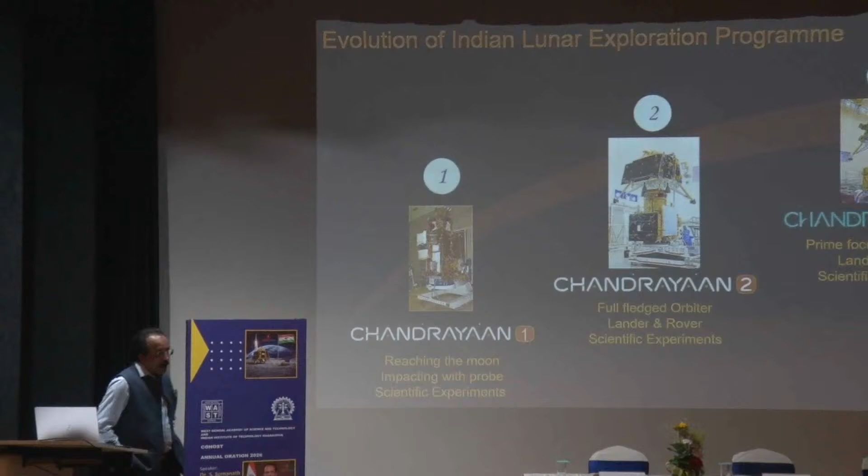So the evolution of Chandrayaan happened with Chandrayaan-1. This was a time when Dr. Madhavan Nair, who was the chairman at that time, was looking at why don't we even look at how to go to the moon. We had no rocket at that time. The rocket we had was only PSLV, which can lift hardly 1 ton plus a little bit to a polar synchronous orbit.

This idea of sending something to the moon was not easy because we needed to find how to send a significant mass - unless you put sufficient mass, you will not have enough fuel to go there and land, or even orbit there to be captured in the moon's orbit, or do meaningful scientific experiments. Still, we worked on it and came up with a method by which we could put it in a large elliptical orbit, slowly raise it to reach the moon's orbit, and then capture it on the moon using a very energy-efficient approach.

I think this is something very unique - others have not done this in the past. So we were able to do a mission with the PSLV rocket to go to the moon, and Chandrayaan-1 was really momentous in its accomplishment. I will show you that in terms of finding new science from the moon.

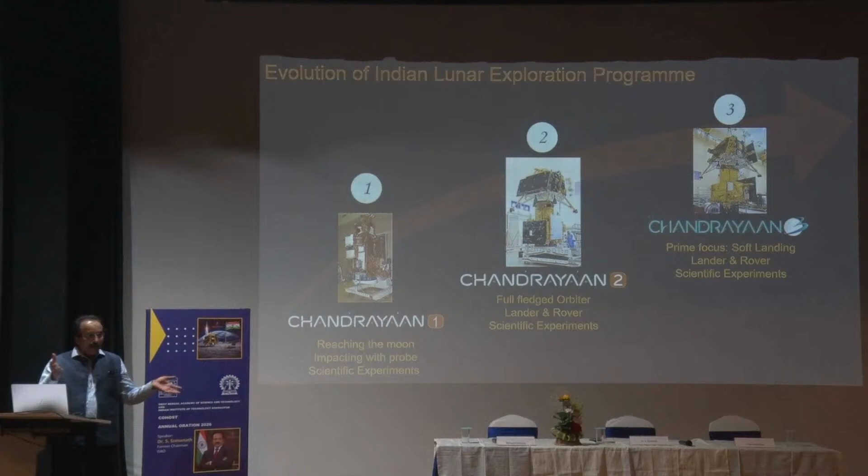And Chandrayaan-2, all of you know, where I had a role to play in terms of the rocket we were building and also the propulsion we were developing for soft landing. Of course, this couldn't achieve that purpose of soft landing, but that was really achieved using Chandrayaan-3. And that's got all these awards - this AIAA award, and the recent Goddard Award, is something that came as the latest of the awards. It received many awards in the past from most of those scientific organizations across the world.

Now, Chandrayaan-1, when we were envisioning how to do it with PSLV using the approach I mentioned, the real scientific payloads to be put on the moon - the entire mass of the satellite was hardly 1.38 tons, and the mass of the payload, the instruments supposed to do the measurements, was hardly 20 kilograms. You can imagine how much of the satellite is propellant, because we need to travel all the way up to the moon to be captured there and brought to a circular orbit.

But then what really happened is once we were building that satellite, a suggestion came from Dr. APJ Abdul Kalam, who was the president at that time. He said that when you are going to the moon, don't go empty-handed. You must put something on the moon, an Indian flag should be placed there. And that direction was given just 6 months before the launch.

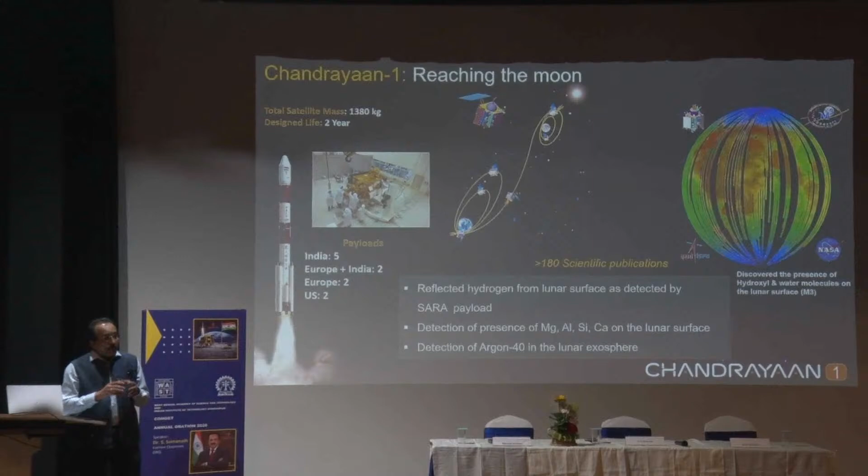Then we had to build something called a moon impact probe. That was put as an attachment to the main satellite, with a separation system so that we could throw it onto the moon's surface and take measurements while it was descending through the so-called atmosphere. There is no atmosphere on the moon, we know that.

But it actually produced so much data, especially on the presence of hydroxyl molecules in the upper layers of the moon. That was one of the earliest findings. Many of the payloads in Chandrayaan-1 were actually not made in India. We announced across the world that others were free to donate payloads, and we would host them on the moon probe to find new science. Today you know the first ever discovery of hydroxyl molecules on the moon was done by an American instrument, and later an Indian instrument discovered it too. So from that context, many of the accomplishments of Chandrayaan-1 are really phenomenal.

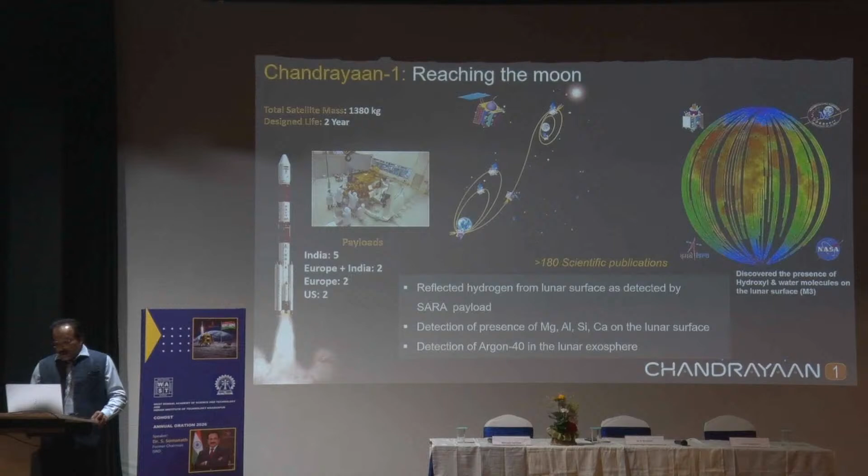Some of the findings of Chandrayaan-1 are really interesting. For example, there was a belief, even after Americans, Russia and China had landed on the moon and were exploring it, that the moon is bone dry. But some new findings from the moon missions were phenomenal, and interest grew much stronger once we discovered water on the moon.

Today we know water is not just a trace material there; it is possibly abundant deep beneath the surface. This is currently being postulated and yet to be discovered. The moon was supposed to be geologically dead billions of years ago, but we now know it's no longer that way. It's a dynamic and volcanically active body. Though there are no visible volcanoes, it must be internally active.

Then there are other findings. For example, it was believed that moon's regolith absorbs most of the solar winds and protons, but that's not the case. Similarly, the lunar wake - when you face the sun, the backside shows a wake, and this wake was believed to be devoid of all solar influences. That belief was also found to be wrong by Chandrayaan-1.

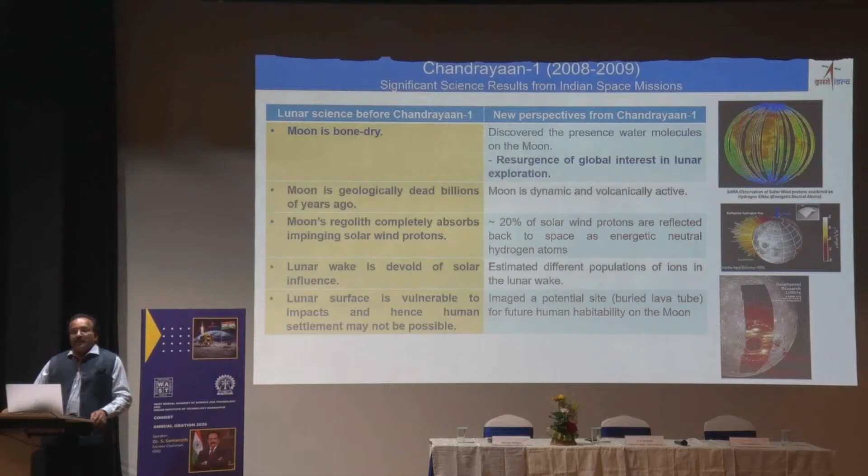Then there are worries about whether we will ever be able to go to the moon and create a settlement, because in the absence of atmosphere, there are a lot of impacts happening on the moon, making it unsafe to settle there. But the current understanding is that there are buried sites and interconnected tunnels on the moon where human beings could possibly settle safely, protected from such impacts as well as radiation. Some of these findings came out during the Chandrayaan-1 time frame, 2008-2009.

Similarly, the moon impact probe was the first probe from India which actually impacted the southern pole of the moon, even before Chandrayaan-3 landed there. Whatever India put on the moon was farther south of where Chandrayaan-3 actually landed. So we must give credit to Chandrayaan-1 for putting something on the moon surface very close to the pole. It impacted nicely, though descending at high speed it would have crash landed and wouldn't have survived.

But during the descent, we had a camera and some instruments that actually measured data. We have beautiful spinning images of the landing on the moon, and also early detection of water vapor on the moon.

Today we know that the discovery of water on the moon came from the payload called M3, a mineralogical payload from the US, but the Indian instrument also detected it. Today we have a map - the picture shows the concentration level of hydroxyl molecules distributed on the surface of the moon. And we know today the pole of the moon carries more water than the equatorial regions.

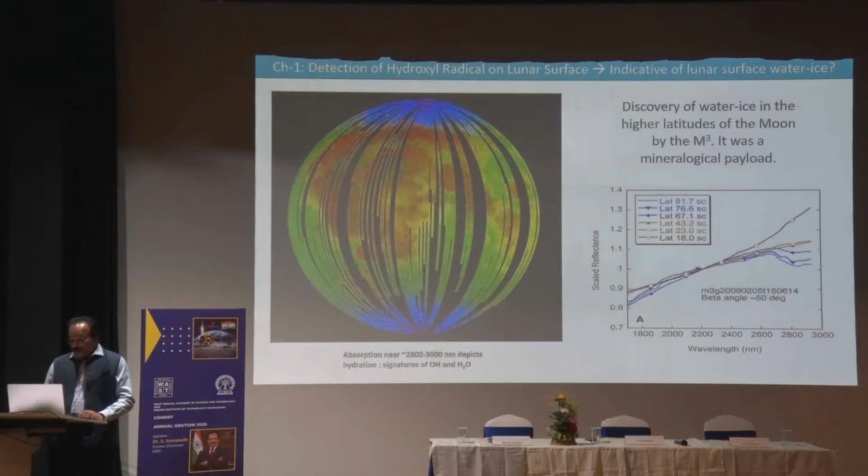Another interesting observation came from the payload called SARA, which looked at the solar wind protons, the hydrogen high energy energetic neutral atoms in the wake field of the moon. This was a very interesting feature which was published and caught a lot of attention from the global community, because we were moving around the moon and could do measurements on the farther side, the wake side of the moon, specifically from this payload.

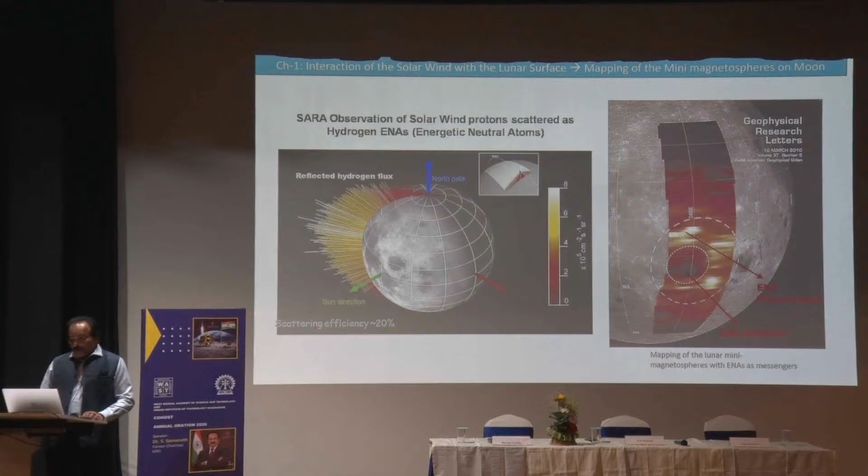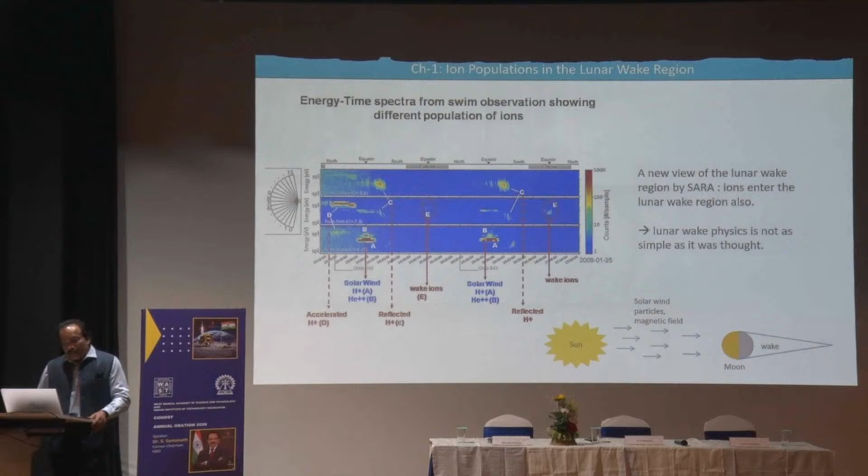Again, the ion population on the lunar wake was also found out from the time spectra of the observations that we did from the same instrument.

Not only were surface hydroxyl elements found, but also the presence of hydroxyl molecules in the atmosphere of the moon was detected using our instruments. For example, the exosphere of the moon also contained water molecules.

All of you know that the moon is not having an atmosphere. What made the atmosphere disappear, and whether there is any way to recreate an atmosphere on the moon, are questions being debated and discussed. What geological activity made the atmosphere vanish - is it from solar radiation, pressure, or impact? There are many questions, but it's interesting that there is continuous loss of volatiles and material from the surface of the moon to the atmosphere, and it is actually measurable.

And actually, water on the moon was not detected on the surface first - it was actually detected in the exosphere layers of the moon using this instrument for the first time.

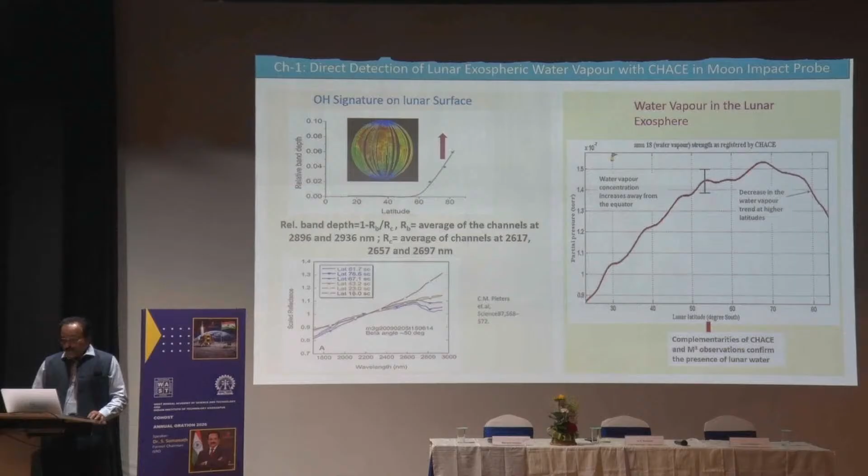Now coming to Chandrayaan-2, the interest in Chandrayaan-1 was really very good in the scientific community. But continuing in the Chandrayaan-1 mode was not going to bring us any benefit, because we would not have any in-situ measurements - most of those were remote sensing type measurements, going to the atmosphere and probing the surface.

But by the time a new rocket was in place, the LVM-3 - because PSLV can lift only hardly 1.1 tons, but now we have a new launch vehicle, the LVM-3, capable of lifting almost 4 tons to orbit - this gave us a great possibility to design a craft with an orbiter, lander, rover, etc.

I was the project director, the first project director who made the experimental launch of this rocket, and later the cryogenic engine development and making it operational. But by the time Chandrayaan-2 was conceived and ready for launch, the LVM-3 had done only 3 missions, and the 4th mission had to carry Chandrayaan-2. I think any spacefaring nation will not take the risk of putting a high-cost scientific mission on board a new rocket which is not yet declared operational. We were only doing qualification launches, and the operational launches were yet to happen.

But then we decided jointly within the organization that we were going to send this craft to the moon, and I am really thankful to the chairman at that time, Dr. Sivan, who allowed me to make that decision and get it implemented, because there were a lot of worries internally. But we said that we will make this rocket succeed this time.

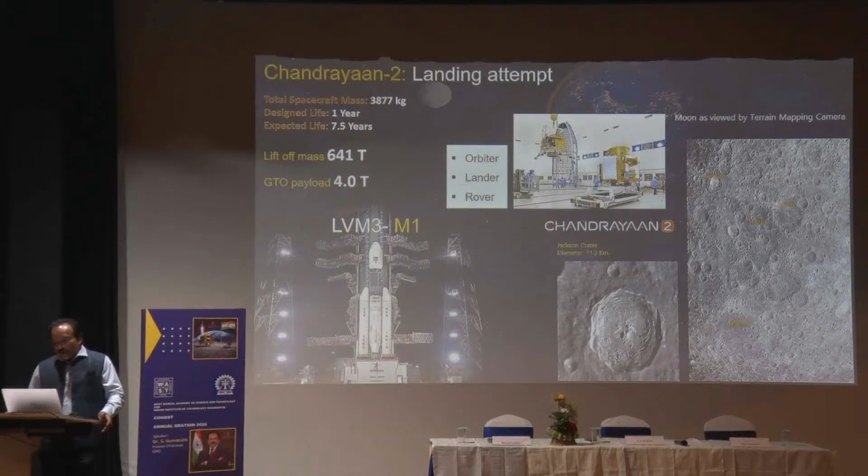We were able to supply this data to them, so they were able to use this data for their planning purposes, location identification, as well as trajectory planning, which are based on vision. So that way we contributed to the global interest in moon missions. Possibly after the Artemis 1 mission, there could be better images from the US. We'll have to see that. But as of today, in the public parlance, Chandrayaan-2 images are the best images available at the moment.

Now coming back to Chandrayaan-2 scientific results, the earlier finding of the presence of hydroxyl molecules, etc., was confirmed by Chandrayaan-2. Because the lander crash landed at the soft landing attempt, we were left with only the orbiter, with a certain number of instruments on it. Using those instruments, we continued to do scientific studies. There was still an instrument to look at the water molecules, and it was again confirming it, and also confirming the mineral composition of the rocks on the moon, which is similar to that of Earth.

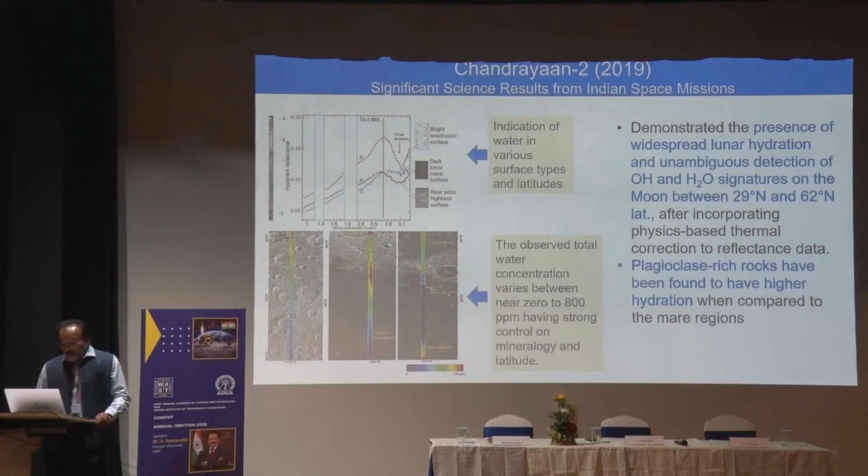For example, silicon-based, calcium-based rocks were discovered there in abundance, which raises some questions on the origin of the moon: whether the nature of the material on the moon and the nature of material on the Earth are similar. It cannot be exactly similar; it varies from location to location, but still you can make a reasonably accurate assumption based on the measurements that it originated from Earth-bound materials, and did not come as a separate object and get captured in the orbit of the Earth. This was a basic question which was still being discussed.

Another interesting finding from Chandrayaan-2 was the distribution of sodium on the moon, using an instrument called CLASS on Chandrayaan-2. Sodium in the form of its constituent minerals changes with day and night characteristics, and its concentration also changes from the equator to the pole regions, with an asymmetry between the north and south poles. All of this was part of the significant mapping of minerals using the remote sensing capability of Chandrayaan-2.

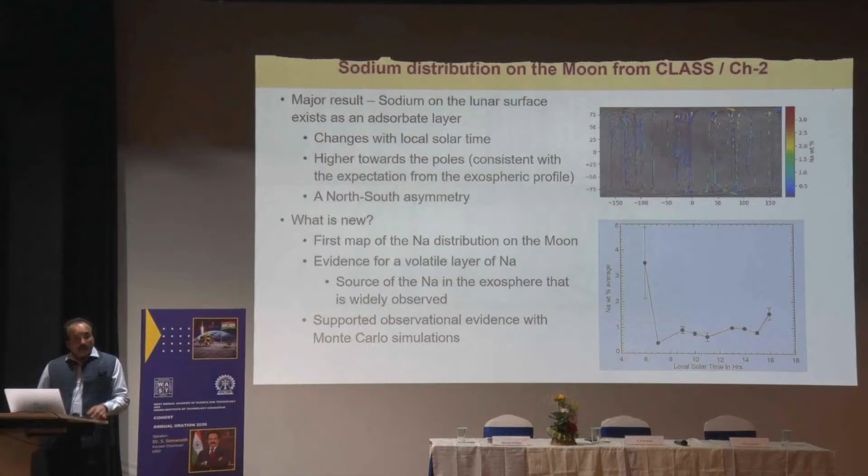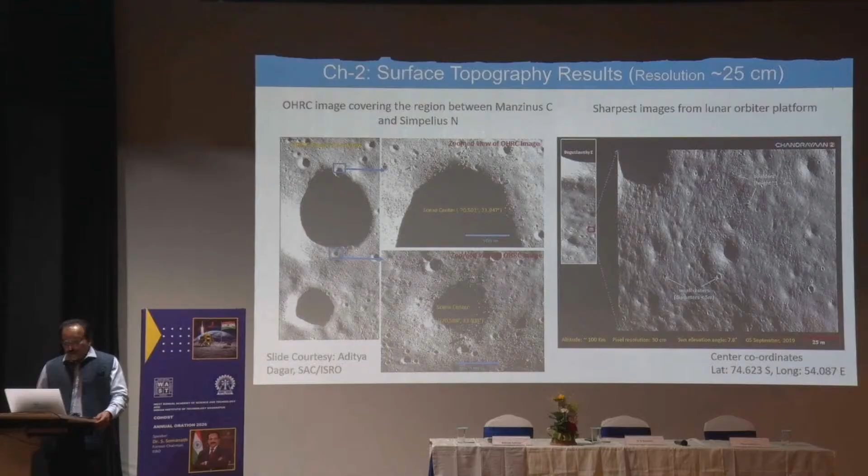And I talked about the image quality. So we have wonderful images of the moon surface from Chandrayaan, the sharpest ever images, which include looking at some of the landing sites of other missions and taking better images of the craters and boulders. Many of these images helped us plan the Chandrayaan-3 landing site locations much better later. We also had analysis of the boulder distribution across various landing sites, which gives a much clearer perspective of the size of the boulders.

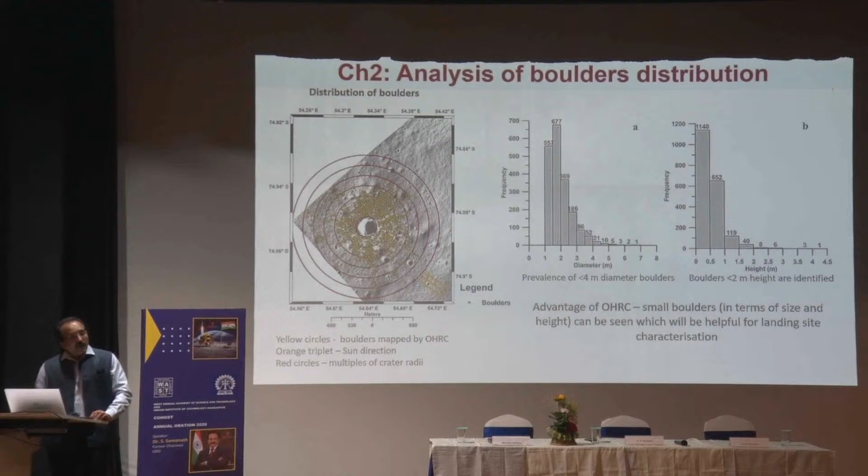Because if you have to make a soft landing, you need to keep away from boulder-dense areas. Where there are boulders in large numbers, you will not be able to find places to soft land properly, because if some of the legs touch boulders, you will end up with a tilt exceeding the limit of the lander. It may topple, which actually happened for many of the landers landing along with us. This information was crucial to ensure that we land at a place where the boulder distribution is manageable. This was done using the images while Chandrayaan-2 images were coming to us.

Another very interesting finding from Chandrayaan-2 was buried craters. This also created a lot of interest globally. There are craters, but over a period of time, soft material like dust covers them, and you do not actually see them. These can be seen only with a type of lidar or radar imaging, which penetrates deeper. You see the density variations, and you can make them out. These are not hard surfaces; these are soft surfaces. There could be a crater where, over time, material got deposited and covered it so that it's no longer detectable.

On Earth also there are many craters which, over a period of time, you don't even see. Cities possibly cover them, but there are natural craters available as proof of large meteorite impacts on Earth also.

I think the same, I'll skip this. Similarly, there are many other findings. For example, the distribution of argon-40 is another very important discovery in the upper atmosphere of the moon, which actually showed the origin of argon and where it is actually originating from in the geological processes. And this was such an important discovery, as the decay characteristics of materials within the moon regolith or the rocks were an interesting aspect to be studied.

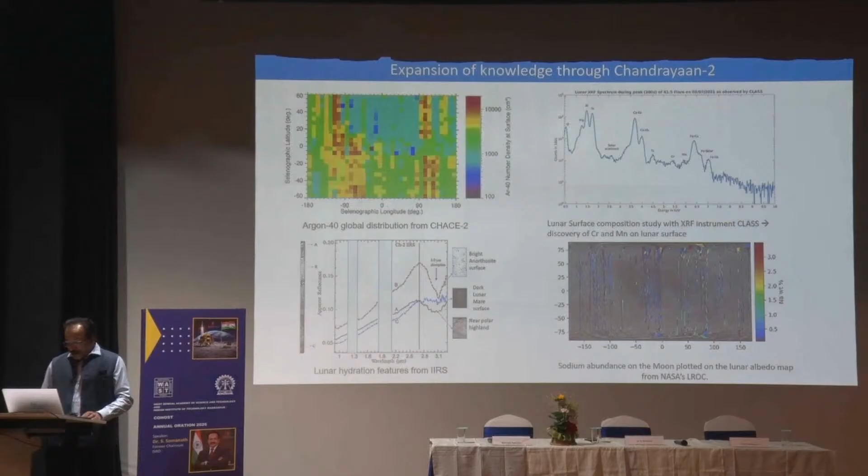So similarly, corroborative measurements from other instruments, from other international payloads, were also done during this time using the Chandrayaan-2 mission. Now, all of you would definitely ask what really happened in Chandrayaan-2 and why it didn't soft land. I think this is something very important for all of us to understand, and how we made Chandrayaan-3 land successfully. So this was very interesting, because by the time the soft landing could not happen, we constituted a failure analysis committee. We went through the reasons why the soft landing could not happen.

But then in a community like this, I cannot give you very precise answers of what exactly went wrong. You have to pardon me, except that you want to know very specific answers. There is a community which is heterogeneous in terms of describing what went wrong. But in a simple way, if I were to tell you, there were many failures. There is a principle in engineering: things go wrong when all windows align.

There are protections against propagation of failures. If something is not done properly, it is actually stopped by a protection somewhere. And if that protection is not there, it propagates to the next level. And then there is a protection. If that is also not there, it propagates to the next level. So if a failure path is aligned so that all windows are open, then it actually manifests in terms of a real failure. It's a very classic aspect of engineering design, how you really prevent a failure from propagating.

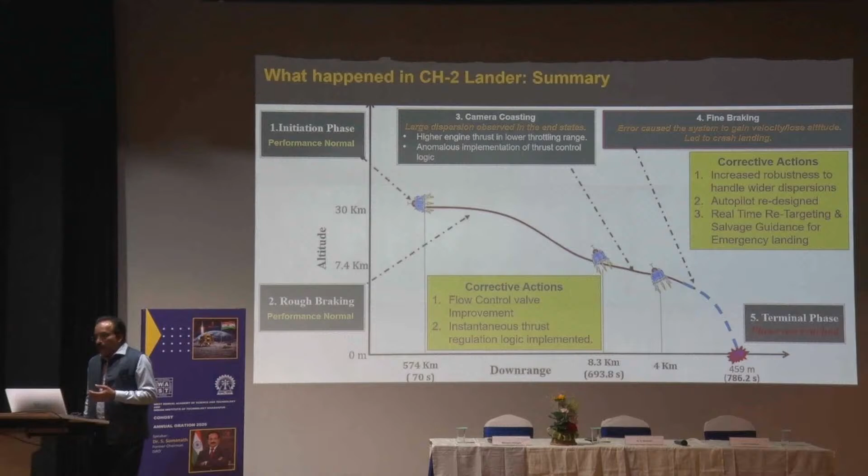That's why even with a working software, you will see that many years down the line, problems start manifesting. I think those who are working on softwares and standards, you understand this. This was one of the issues.

Second issue is that you start taking assumptions. And we found out that when you engineer something, you start discussing assumptions. And you put self-constraints which are not imposed by the system. You artificially constrain things. And this is a very, very clear case of discussion which is required and debates required in systems where, why did you actually constrain yourself? No, I have not put that constraint in front of you. You yourself artificially constrained it.

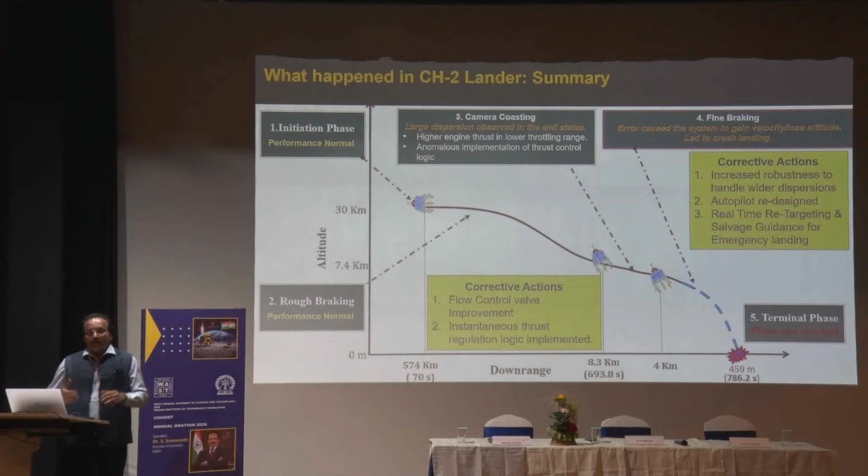One of the artificial constraints was when the spacecraft is moving, you know that it will be subject to rates. We call it rates, degrees per second in different axes. You don't allow it to exceed certain thresholds. And if it exceeds the threshold, you will clamp it at that point. And you generally do this for a very wide value than what is expected. Suppose it is going to have 2-3 degrees per second, you may put it at 20 degrees per second. It is 10 times of it. And you think that it will never exceed.

This is again a wrong thing, because if there is no reason to put a limit, you should not put a limit. And we found that if you had not put a limit, then the mission would have survived. We found that the mission would have survived even if the software error was existing, even when a bound was put, an unwanted bound. But there is a chain of such things which existed in this, and this actually made the landing into failure.

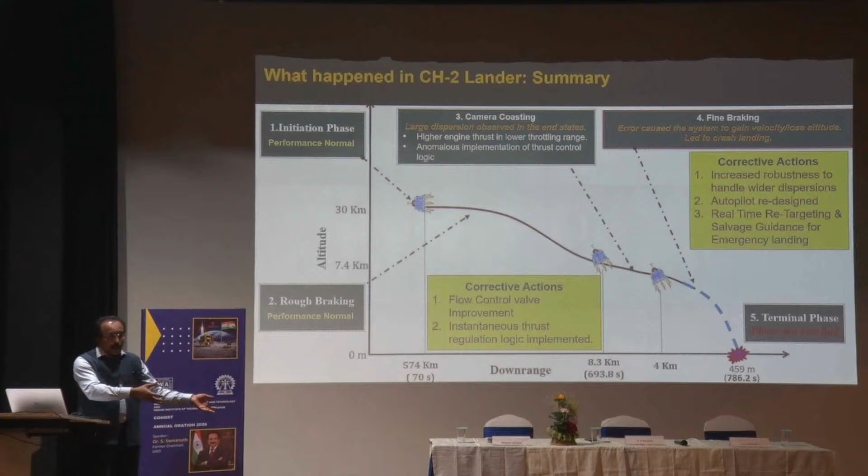But I can tell you that it doesn't mean that now Chandrayaan-3 landed, I can guarantee that software was perfect in that. It actually happened in such a way that it worked in the nominal conditions which actually didn't trigger any failure scenarios. And this is very important for everyone who engineers complex systems to understand. One-time success doesn't mean that everything was perfect. And we know it very well.

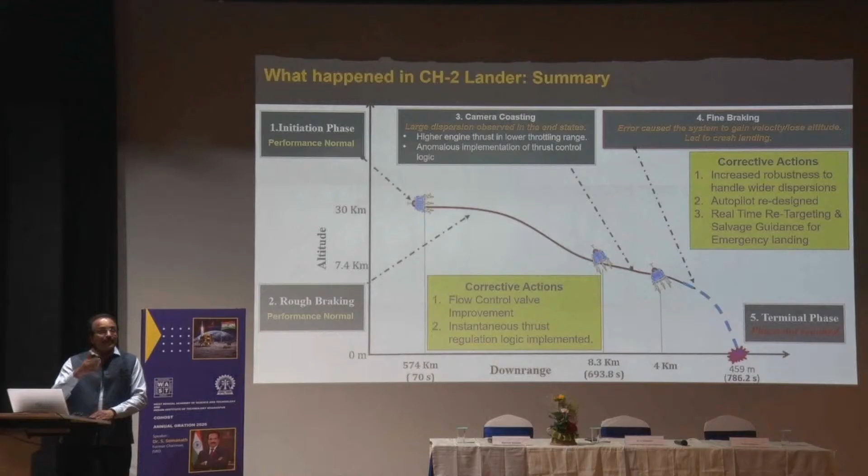In space engineering, it is such an important thing to realize that making one-time success is never a success. You need to do it over hundreds of missions, extending over large parametric perturbations. I think those who are dealing with statistics understand the distributions of parameters, its bounds, and how a combination of bounds can actually trigger a complex failure scenario.

So I told the reason for failure in a very simple way, but then the real problem of the failure was still not revealed even after the failure analysis. Then this is an interesting story. The real problem of the failure was none of this. It was in terms of two engines. There are multiple engines in the craft, and we will show you the engine and show you how it functions. And these engines develop thrust.

And if you do not balance the thrust perfectly, you will develop a differential thrust and it will cause the vehicle to rotate. And controlling the thrust was using an algorithm and a motor drive valve, and there was an issue with respect to this drive, causing the motors to behave differentially, causing the thrust to be higher in one over the other. And there was no way to control it.

And this was a primary failure, but it was never even discovered during the failure analysis, because the measurement showed it is equal. So there is something which is going beyond the measurements, and this was found by a ground test simulation which lasted for years together, almost 3-4 years we took to find out what went wrong, and it got revealed to us at some point in time, and then that correction solved the entire problem for Chandrayaan-3.

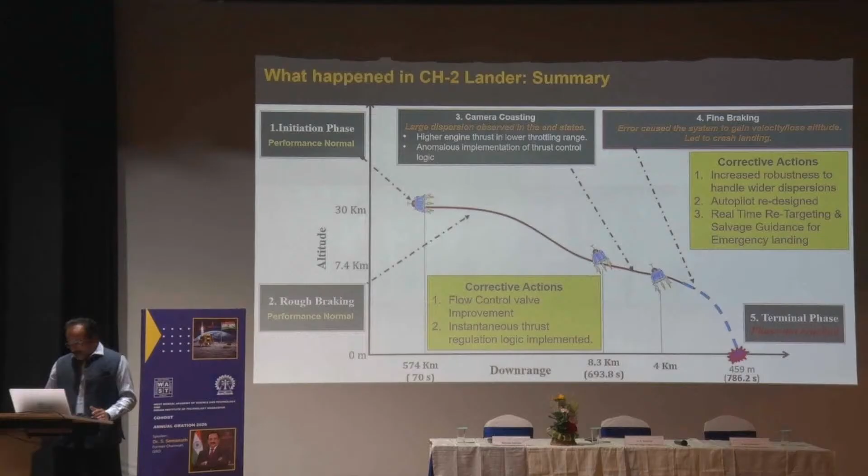But then when we were looking at Chandrayaan-3, we were looking at what heritage of Chandrayaan-2 we need to take, and how do we really improve to make sure that there are no unknowns in the new Chandrayaan. So we understood that the Chandrayaan-2 orbiter did most of the work. So we said don't put unnecessary instruments in the orbiter, move it out and minimize the complexity of the orbiter and put more into the lander.

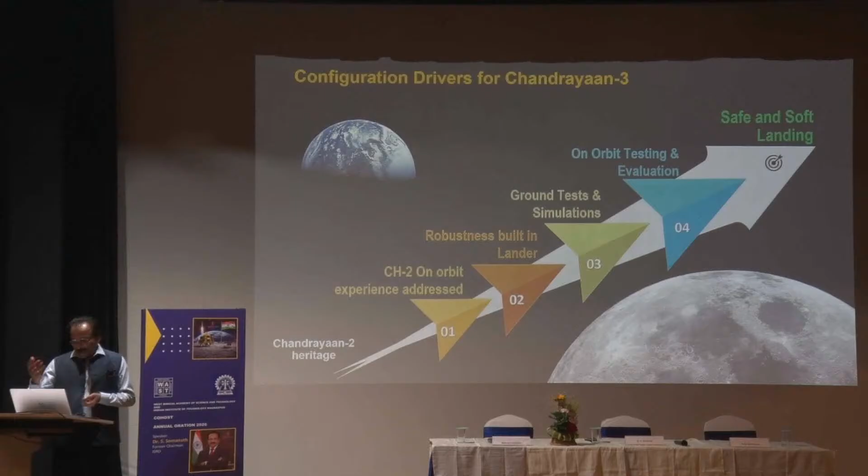So we made the lander much stronger. We put more fuel in it. We worked out newer algorithms. We developed new instruments. We strengthened the whole thing. There are many such improvements which happened, which I will discuss with you, and what made the soft landing possible.

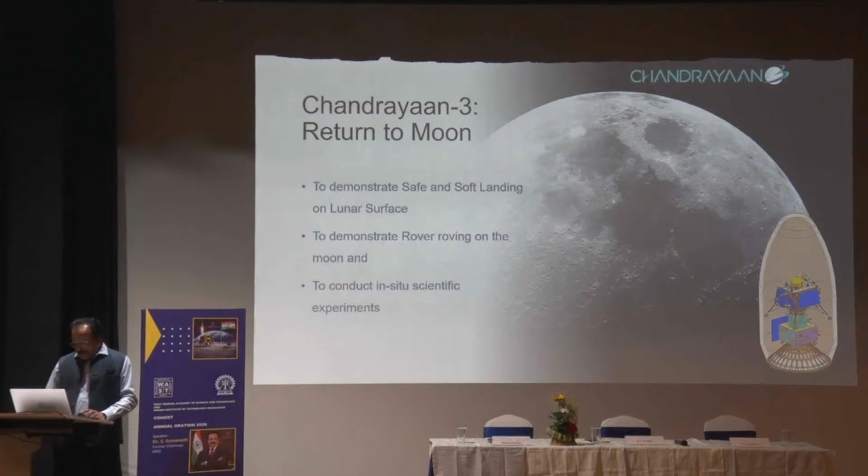Now, Chandrayaan-3 was a return to moon, again with the same objective of going to moon and then landing. And the phases of missions which we designed from liftoff to reaching the moon was exactly the same. There was no difference. The whole algorithm which was perfected in going to moon and capturing the moon was proven in Chandrayaan-1, it was proved in Chandrayaan-2.

So we resorted to the same approach: put it in a large elliptical orbit around the Earth, progressively burn the thrusters, fire at the perigee, raise the apogee so that the apogee reaches the moon and gets captured in the gravity field of the moon, then slowly reduce the elliptical orbit to a circular orbit and then land. So this approach was the same, but when you do it like this, it takes long periods of time.

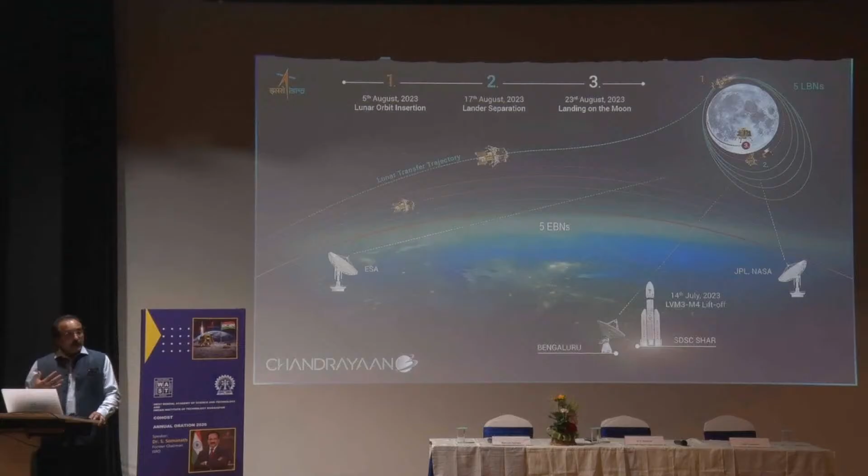Recently when Artemis went to the moon, how many days would they have taken to reach the moon? Maybe 4 or 5 days. When human beings are involved, you need to go very fast. But there were no human beings, so you could take longer periods. So we took almost 30 plus days to travel and reach the moon. That was okay. But when you really send humans to the moon, we can't do this approach. We need to make much more powerful rockets, and heavier payloads are necessary if you have to send humans to the moon. Now, let me go to the making of Chandrayaan-3.

In Chandrayaan-3 the constituents were just the same, the orbiter, the propulsion module. The orbiter is now called the propulsion module because it had no high resolution camera. It had no instruments to measure what we did in Chandrayaan-2, because the Chandrayaan-2 orbiter was still working. So when we sent Chandrayaan-3, there was no real need of an orbiter. But we needed something to carry the propulsion to take the lander up to the moon orbit. So there was something called the propulsion module.

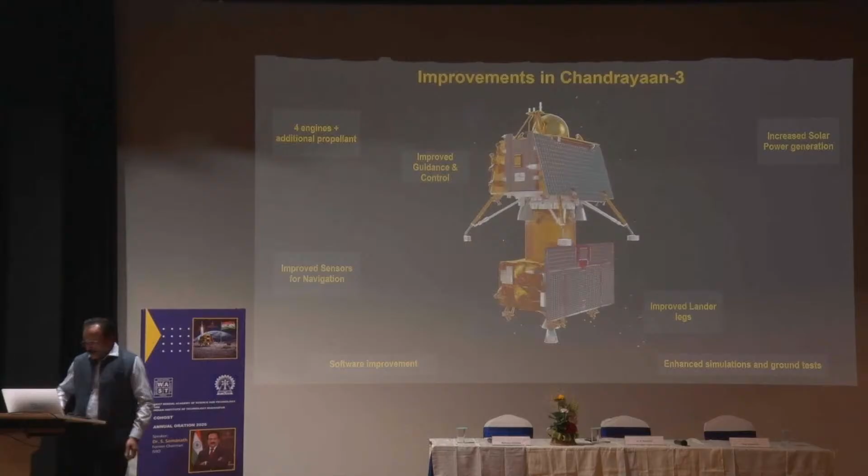There we could actually maximize the propellant loading so that in case of any propulsion issues we would not miss reaching the orbit. Similarly, we strengthened the lander and rover substantially, and I will tell you what all we did. There were many improvements in terms of engines. For example, we had 5 engines. We reduced 1 engine and made it just 4 engines, primarily with the algorithm change and also mass reduction on the lander, so that we were able to manage the landing with just 2 engines instead of a central engine approach.

The entire guidance algorithm was modified in such a manner. I will give you one example. How do you look at the guidance algorithm? Assume that we are going to land at one point on the moon. That point is already marked. You know the latitude, longitude, and exactly where we are going to land. And while we are doing the landing attempt, the algorithm understands that I am not in a position to land there due to my time available, fuel available, or the altitude change which actually happened. And if I try to attempt there, then I may tip off and fall and fail.

And the algorithm understands that it should actually land here, where I am able to land safely. So safety became a more dominant parameter than accuracy. This is a very crucial decision. I think this decision in the algorithm was very important. In Chandrayaan-2, the algorithm demanded that it should go and land there, irrespective of whether the safety of the mission is compromised. I think such debates and discussions internally changed the entire guidance algorithm.

And we also tied up with some of the professors in the Indian Institute of Science and others to bring on board their simulation capability, mathematical capability, and train our young engineers within the organization to look differently at algorithm development in guidance. And that actually helped us in building more robust algorithms.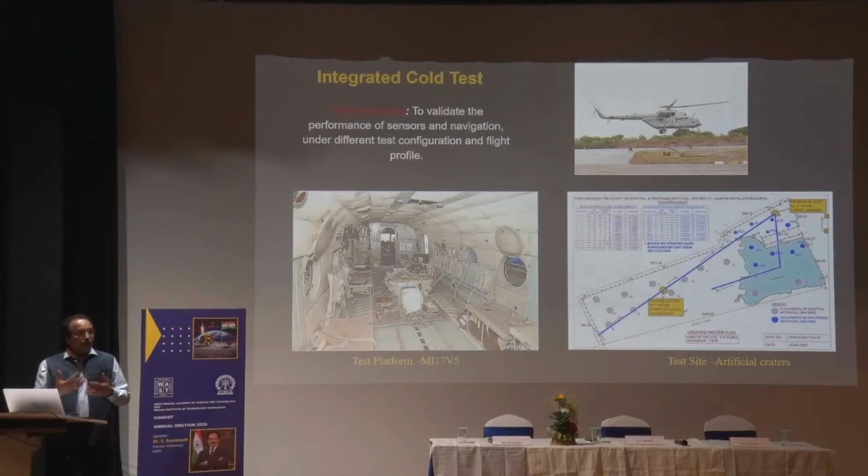We put all the Chandrayaan-3 instruments electronically inside the helicopter, put all the viewing instruments at the bottom side, and flew over the areas and simulated the algorithm to see whether the hardware and sensors are responding to that type of process.

Another interesting test we did is hanging from a crane which is almost 100 meters tall. The entire propulsion module was hung using a counterweight system so as to offload the gravity. Of course, gravity cannot be easily offloaded using counterweight systems, but it's still a closer simulation.

And then with the dynamics of the cable and suspension, there are some errors coming, but we can model all of that, capture that model, and then find out how the control system responds to such propulsion behaviors. So this was crucial to see.

Simulating the landing on Earth is actually extremely difficult. Gravity is a field force, and a field force cannot be taken away. Whatever you do, it will still be there. Even if you put a counterweight, it will still be there. And there is the effect of air, with the dynamics getting modified due to small drags.

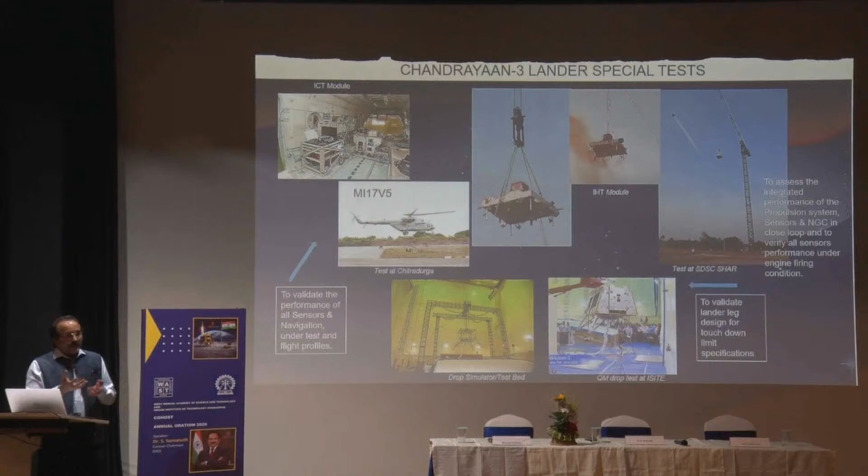And another problem is its mass. Even if you put a counterweight, the thrust of the engine is so small. Gravity on the moon is...

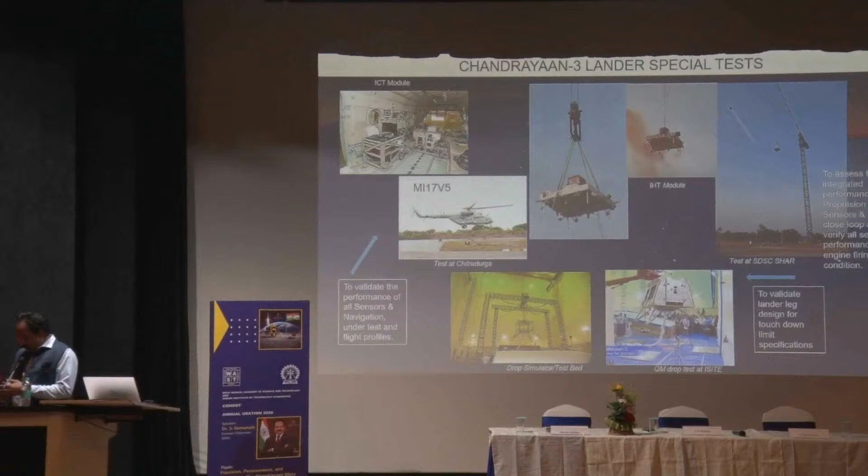I think it's okay. The gravity of the moon is... am I okay? Is audio okay now? Yeah.

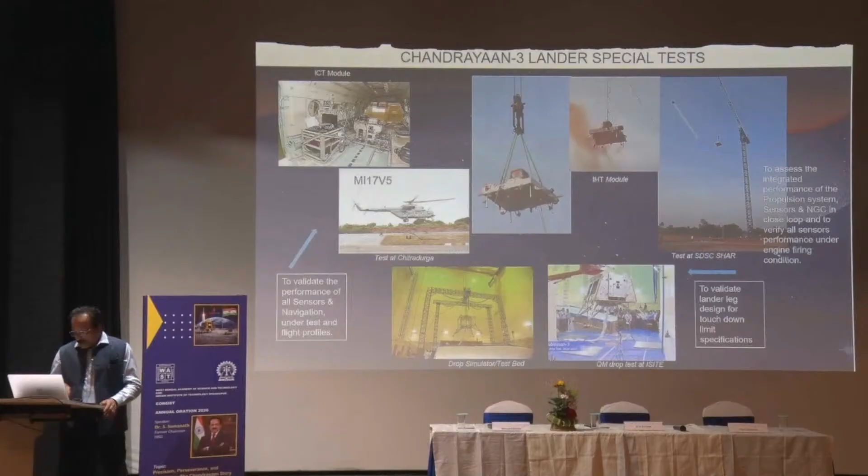The gravity on the moon is 1/6th of Earth's, and whatever you do on Earth, you cannot actually simulate that 1/6 scenario exactly. You can put a counterweight and remove the gravity, but exactly simulating 1/6 is not possible. Under these constraints, simulations were done and we made good sense of the dynamics, but the rest was left to mathematical modeling and simulation only.

Now let us look at some of the simulation testbed videos. It will look like a very complex cabling and assemblies inside the helicopter. We actually flew these helicopters for many sorties. Getting a helicopter from the Air Force and running the sortie itself was a tough job in terms of their schedules.

Craters of this nature were built where we captured images using this setup to see whether it was capable of identifying landing locations. But they are not exactly like the moon - of course we can't create the moon's reflectivity or surface characteristics. At least the geometrical features could be detected using these cameras.

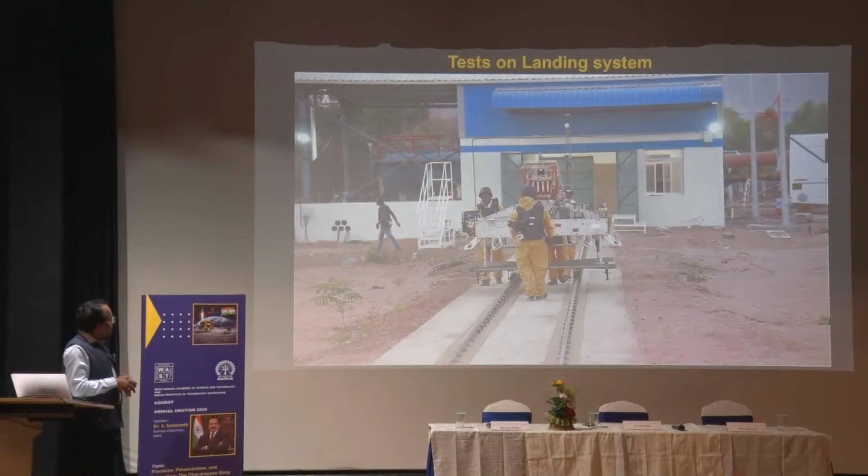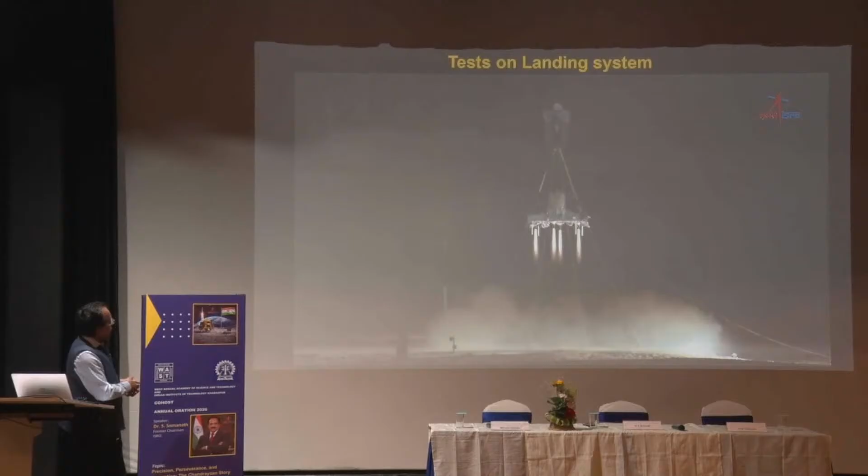Now what you're seeing is a propulsion test where we hung it from the crane with a counterweight system, and then see the engines firing, the control thrusters firing. This is a tie-down test and this is a hanging test.

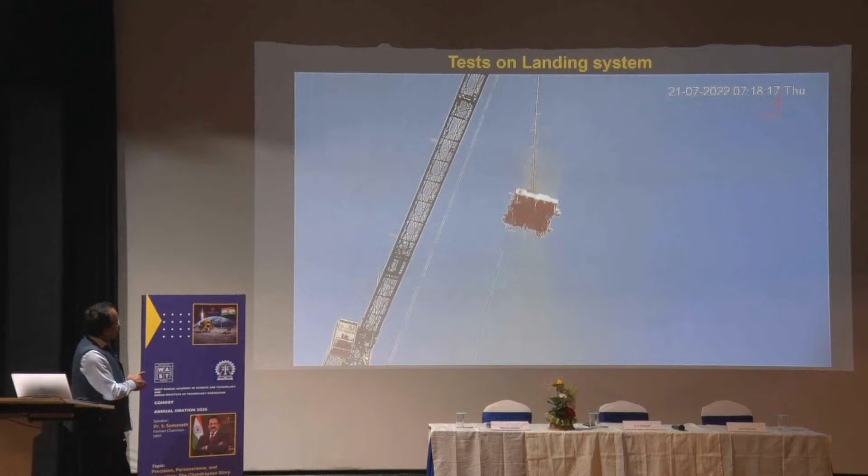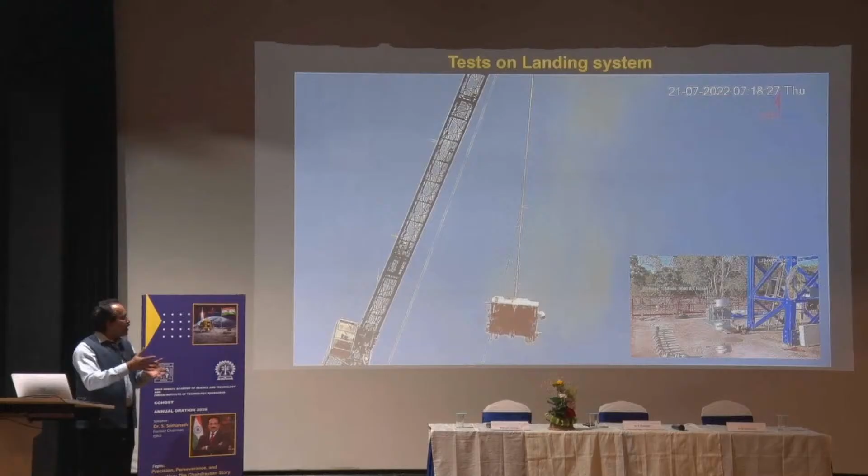This doesn't move now because we are tying down the whole thing. When actually firing it in the hanging condition, the craft is made such that the thrust is exactly equal to the mass, so we can balance it at near neutral conditions and see its dynamics. But the dynamics will not be exactly the same, because the real hardware is not exactly the same as the one under testing.

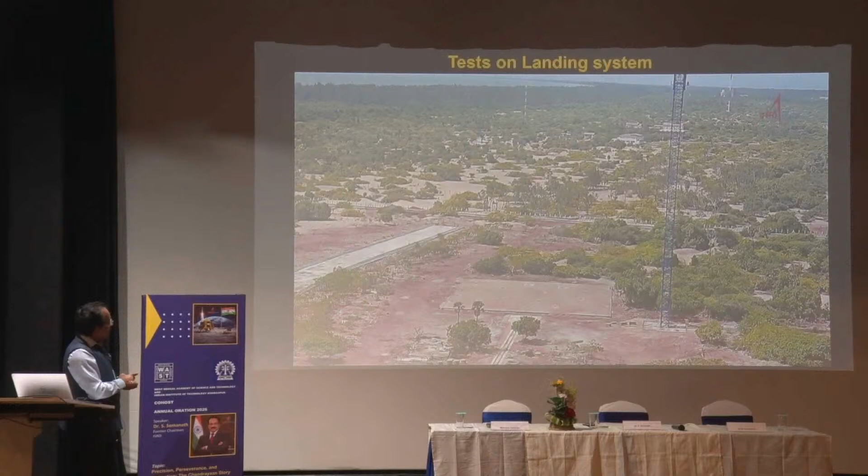This whole facility was built at Sriharikota. This is the landing site where we had the landing location and the crane facilities, where craters were also simulated. This is yet another test facility with crater simulation.

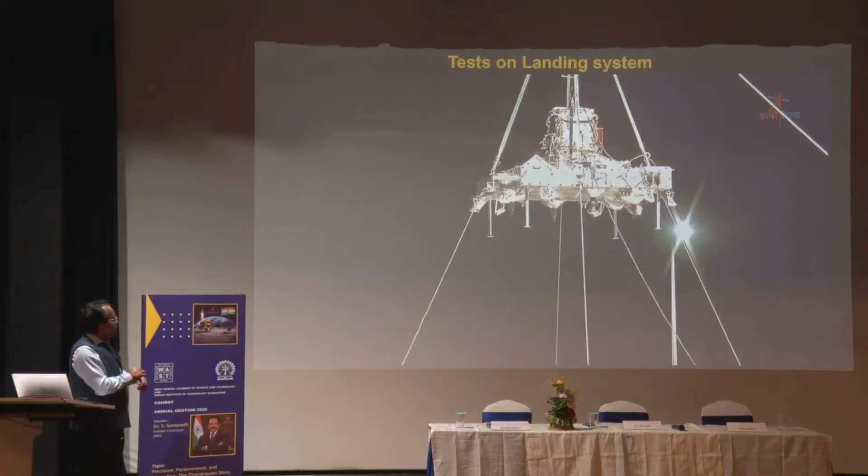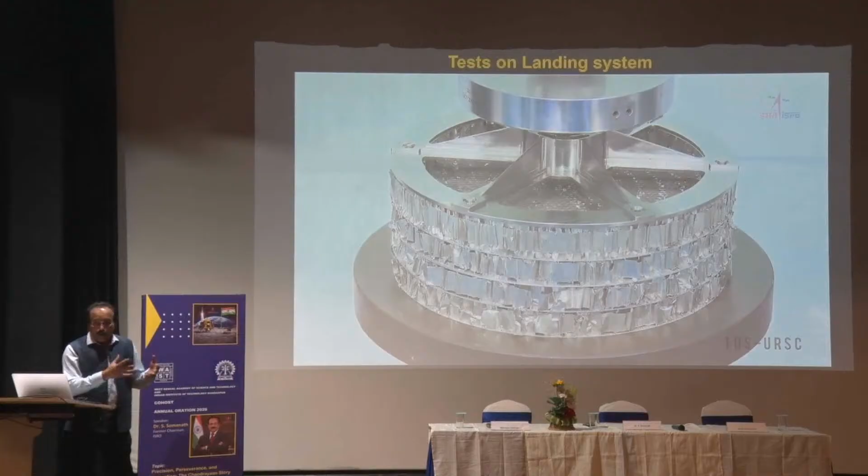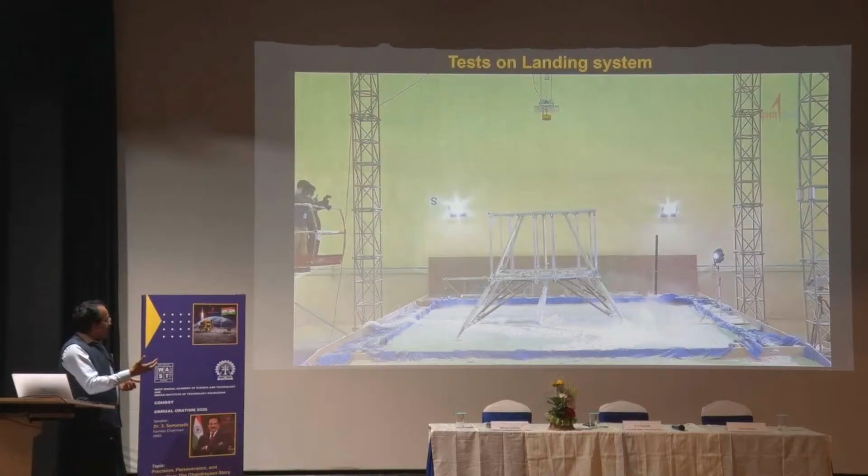This shows a test on the landing legs, which have their own crushing energy-absorbing systems with honeycombs and dashpots that can absorb impact energy. Hundreds of tests were done at different inclinations, material characteristics, and regolith densities to see that it actually survives impact without causing undue shocks. This was done on simulated structural hardware, because I am not in a position to show the exact engineered hardware in this video.

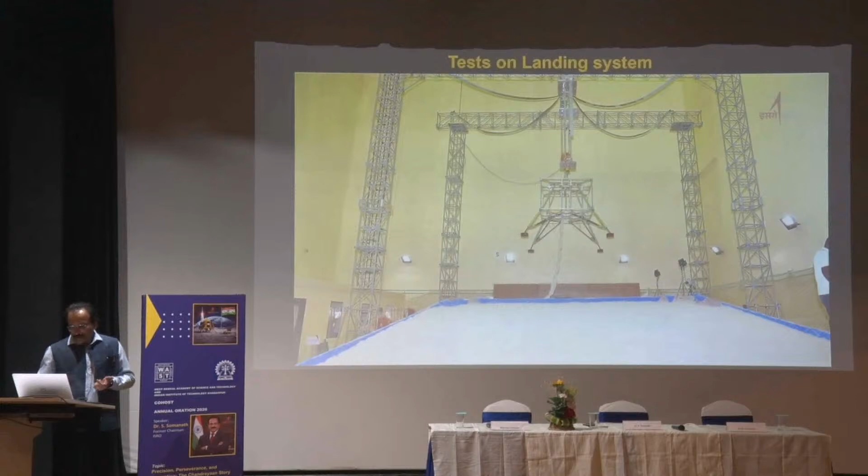So finally, we built the Vikram lander. The Vikram lander now stands almost 1.7 tons with the rover, because it had a lot of fuel primarily required for decelerating, bringing down the orbit, as well as landing time. It's quite a big lander compared to many other international landers.

And the rover was much more cute - 26 kilogram mass with 6-wheel rovers, the rocker-bogie type of design. But the most important part: it contains 2 spectrometers, one based on laser ablation. A laser will be sent to ablate the material on the surface, and using the ablation you can do spectroscopy. Another was with an alpha particle generator, a radioisotope put there with the help of our atomic energy people, used as an alpha particle emitter for spectroscopy. So 2 spectroscopic instruments were on board this simple payload, along with communication, power generation, and other capacity, as well as commanding capability from the ground.

And the launcher was just the same - the LVM-3, in its next mission, was ready for launch. But before this launch, we had also done some more commercial launches, hence we were approaching this launcher with much greater confidence, not like what we did for Chandrayaan-2 at that time.

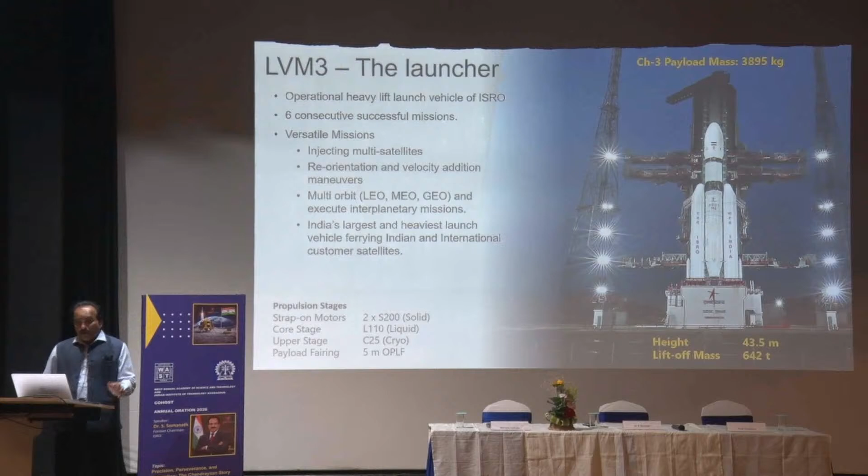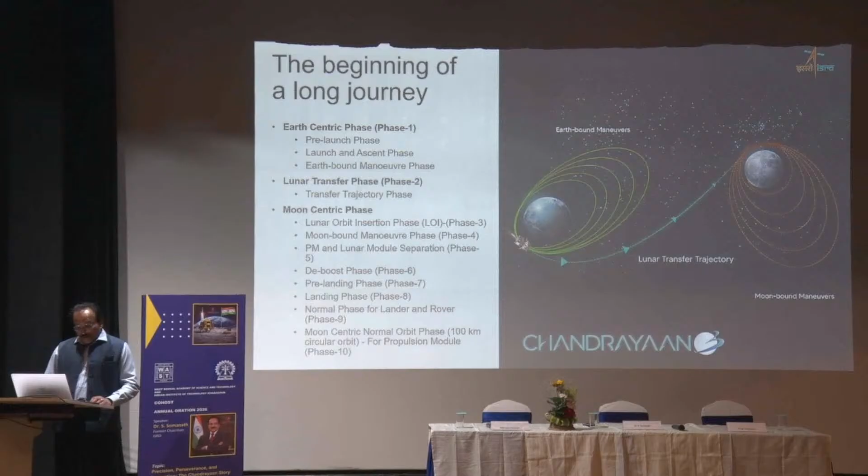Now looking at the mission operations, the journey from Earth to Moon was similar. There was no much difference compared to Chandrayaan-2 or even 1, in terms of putting it in Earth orbit, raising the orbit, and then reaching the Moon and getting captured. And Chandrayaan-3 got captured on the Moon surface on 5th of August, 2023.

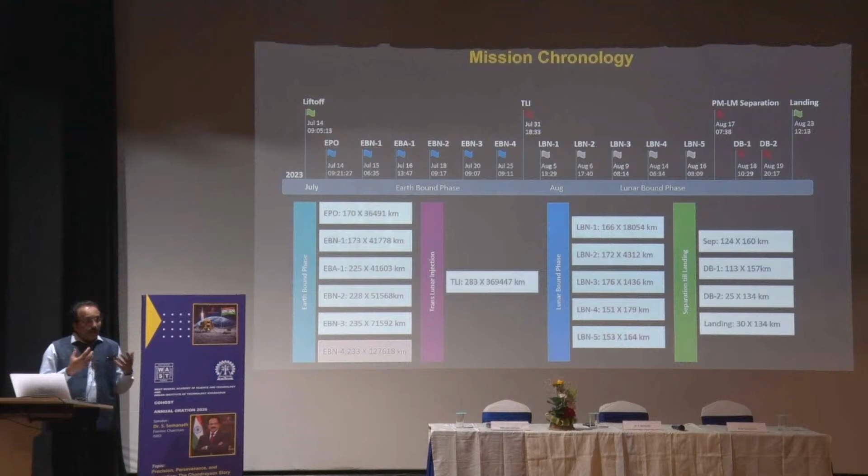We go through an elaborate chronology of events that will actually take it to the Moon. I think it is so precise that it needs to be done using measurements with the support of global players. Chandrayaan-3 cannot be achieved by India alone, and we need global coordination and support.

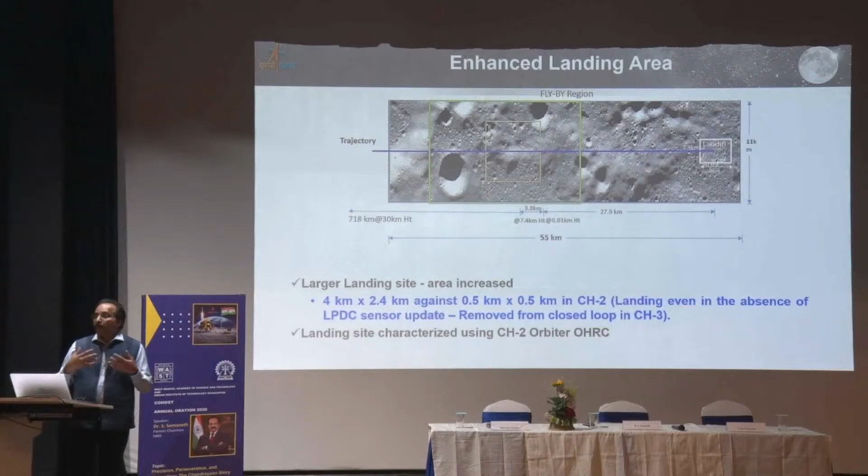So we took support from various players, including NASA, ESA, their ground stations, their tracking support, their data flow into our system, and verification of the data and orbit precisely, which are necessary to achieve such missions. One reason for our success in Chandrayaan-3 is the enhanced landing area. Earlier in Chandrayaan-2, we defined a very small landing area because the image quality data on boulders and craters wasn't good enough to plan a better area. So we decided to plan a longer area since we now have high resolution data, allowing us to land anywhere in the larger area, removing much of the uncertainty regarding rates exceeding or fuel not being enough. So this could handle that aspect.

And the landing happened. I think all of you would have watched it live on TV that day, on 23rd August, when it landed. It was really a phenomenal thing to see.

But I can tell you that we planned so many contingencies for this landing, and what would happen at each of these events - from lowering from a 100-kilometer orbit first to a 30-by-100 kilometer elliptical orbit, progressively bringing it to a position vertically above the landing site, and then bringing it down slowly at a given rate. And if, once closer, the camera shows it's not good for landing, it should be able to move laterally and land at another place.

So all of these algorithms were built in with its instruments. There are dangers in this, because some instruments may give totally wrong data. For example, the radar data measuring the depth of the location may go wrong. Your sensors may drift, and sometimes your cameras may not function. So in such scenarios, how do you really handle it?

I think this is very core to the algorithm design - in case a multi-sensor fusion algorithm fails, how many sensors are needed, what options are required for us to land. So we made sure, in simple terms, that if every sensor fails, it should still land safely. That was the algorithm, simply put.

So we had to design for a blindfold landing, ensuring it would still land with low velocity. This was programmed even for zero sensor support. Of course, you can't land with zero sensors - you need some terminal sensors to ensure it has actually touched down so the engine can be switched off. So we even put a micro switch there to ensure it actually landed, and when the micro switch closes, the engine can be shut down.

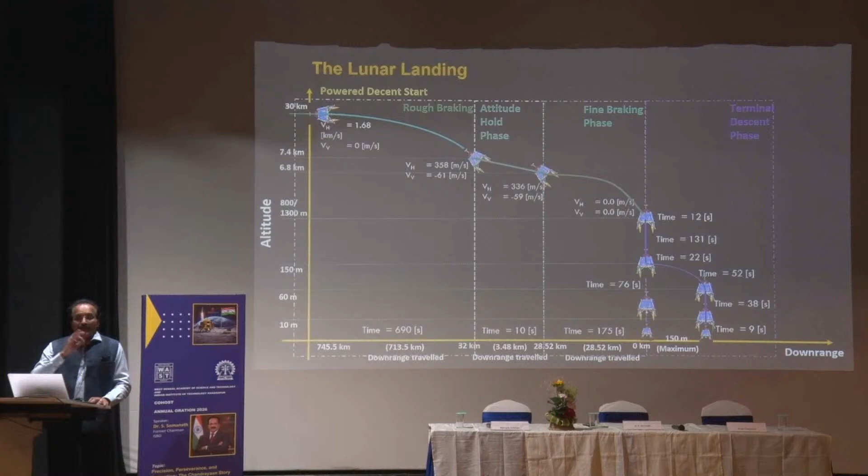To that extent, we designed it such that this time it would be successful. And I can tell you that today, none of the sensors failed. Everything worked, and the entire landing followed the primary path only - never a redundant or alternate path was triggered in the algorithm.

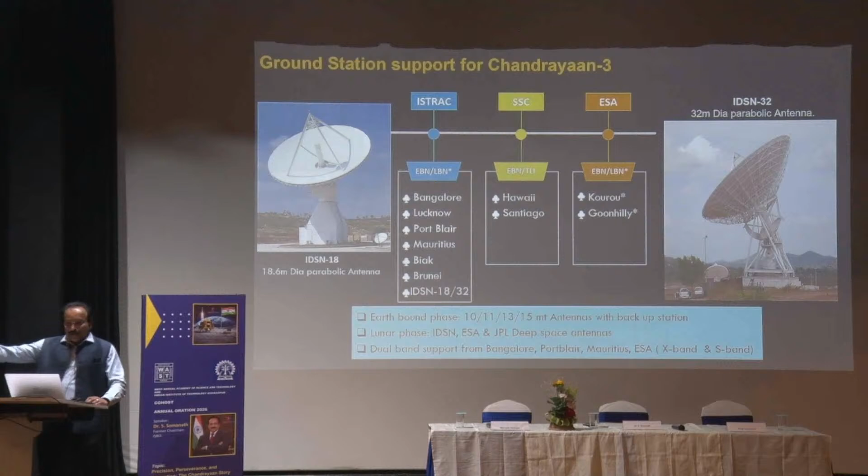And of course, to do this we needed a lot of support across the world, in terms of Indian ground stations and foreign ground stations. I should thank the many people across the world who worked day and night to keep feeding us this data. Unless this data comes in, the Moon cannot be seen all the time from India - it goes to the other side of the Earth, and we need continuity of communication to do such a mission. The rover was really doing very well.

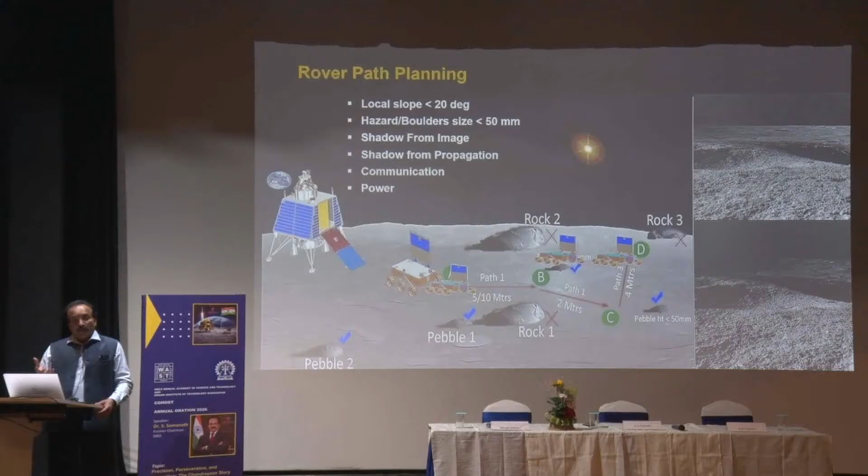It actually traveled across the Moon's surface for almost 100 meters, commanded from Earth. In fact, it was about to fall into a small crater, but it was able to detect and prevent that, and then travel another path. Its spectroscopic instruments did wonderful measurements at multiple locations, and we have a huge amount of data. We also had huge RF links - for example, maintaining communication was very crucial.

The rover should communicate to the lander, the lander should communicate to the orbiter, which should send the data to the ground in a seamless manner, both in terms of data and commands. This was achieved through multiple paths to make sure that in case of any path failure, we would still be able to communicate.

Now, some of the scientific outcomes I will quickly discuss and then conclude my talk. There are primarily 6 instruments on Chandrayaan-3: Rambha, Chaste, ILSA, APXS, LIBS and SHAPE, and these names are abbreviations of their functions.

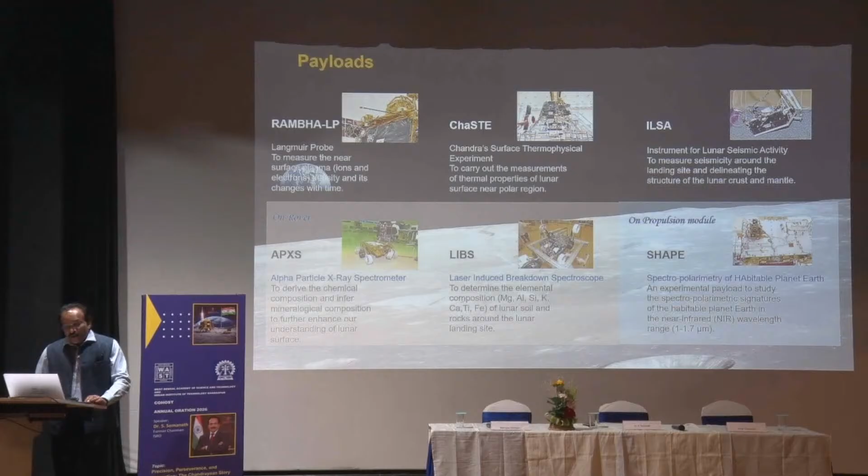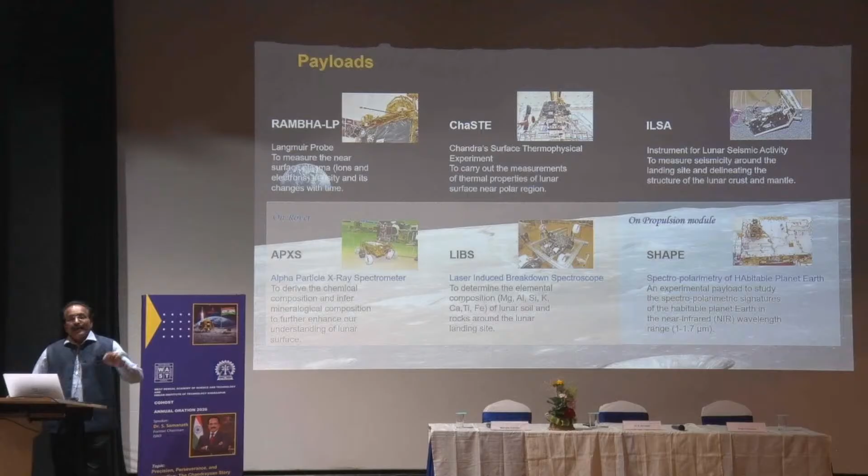Rambha is actually a Langmuir probe which measures the electron densities at very low height from the surface. Chaste is an instrument which pierces into the regolith and measures the thermal conductivity of the regolith by heating that zone and measuring its response.

ILSA is an instrument to measure moonquakes. It's a triaxial accelerometer sensor deployed from the surface using a cable, and you can actually pull it back and place it at multiple locations.

APXS and LIBS are spectroscopic instruments, one based on alpha particles, another based on laser. SHAPE is an instrument looking at the spectroscopy of Earth from the moon, to find out the spectroscopic characteristics of a planet which is living, using its elemental composition.

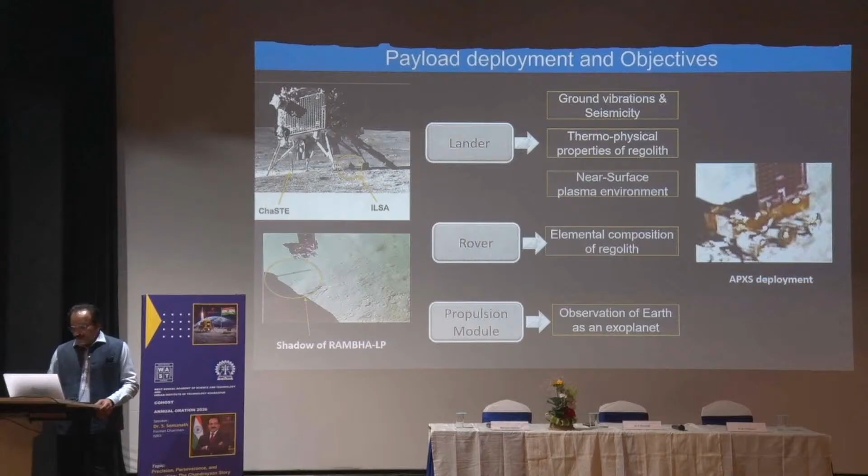So I've already told you about these, and we saw each of them deployed at different times, because we had only 15 days from landing to sunset. Sunlight on the moon lasts just 15 days, and you need to complete the entire mission and get the data within that time. It was done within that window, and we produced fantastic results.

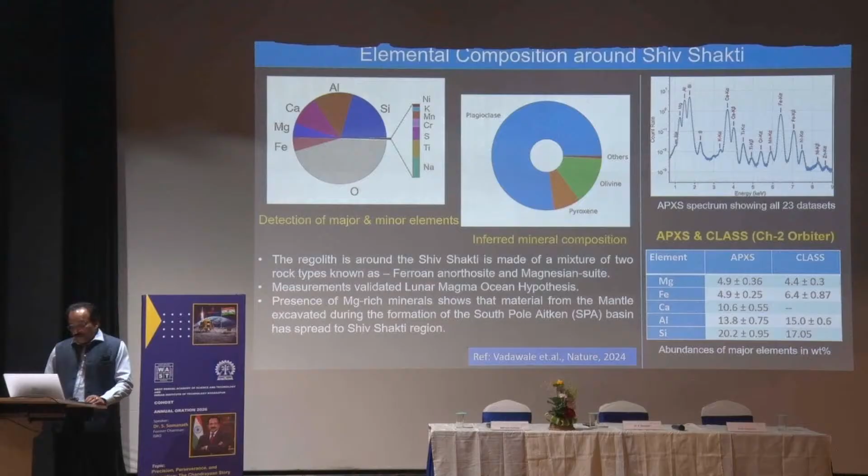One result is on the elemental composition at the Shiv Shakti point. The location where we landed was named Shiv Shakti by the Honorable Prime Minister after his visit to our control center two days after landing. We had wonderful data which was corroborated with earlier global data.

Similarly, the mantle materials detected at that point were very primitive. This is another interesting piece of data. I'm going through this quickly because I want a few minutes at the later phase.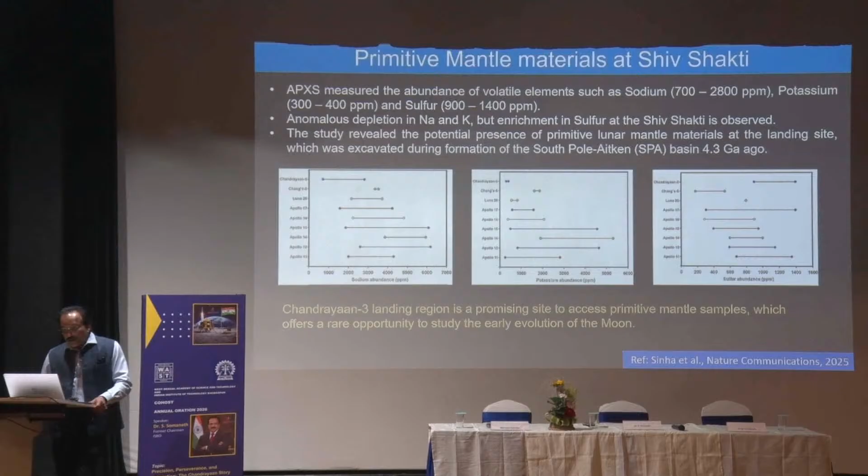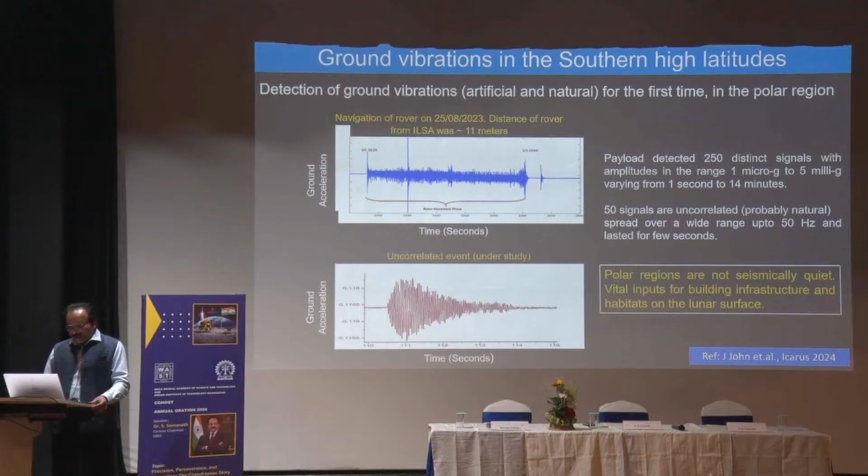We also measured a lot of ground vibrations using the sensors. This is one measurement not available from any other world-level instruments, and there are a lot of discussions currently happening on whether it is actually moonquakes, instrument noise, or the rover's movement. There are some discussions of that nature, but the data shows the moon is still very active. We also talked about the buried crater from the Chandrayaan-3 landing, which I described some time back.

There was an in-situ measurement from ChaSTE, where we pierced a composite probe with its own temperature sensors, and we found a significant temperature gradient from the surface of the moon to its depth, indicating the conductivity of the regolith is much poorer than previously thought. This could be a reason to believe future human habitation could be underground, where you can get a comfortable temperature and live without much heat loss.

This is because the temperature of the moon goes to extremes of high and low under day and night conditions, so you need good insulation capacity. That is the point this curve shows.

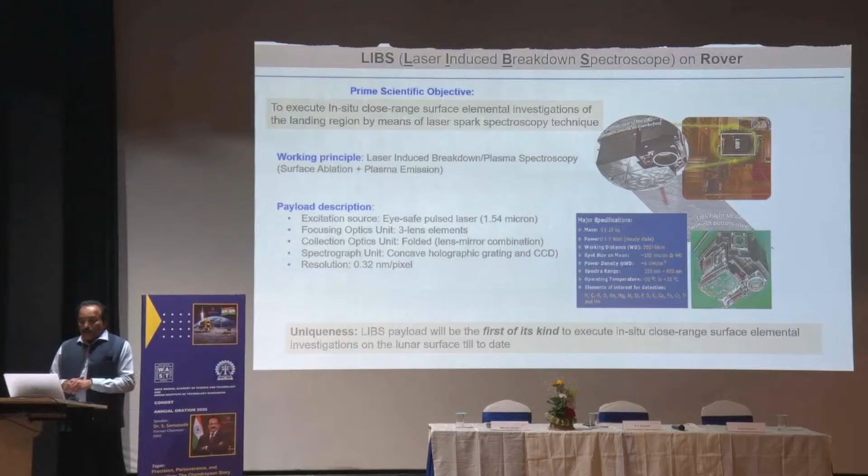We also did laser-induced breakdown spectroscopy on the surface of the moon, and the elemental composition from LIBS covered multiple locations, though not all publications have come out yet. Even now, publications are coming out in this area showing abundance of many elements, including sulfur, which was very interesting.

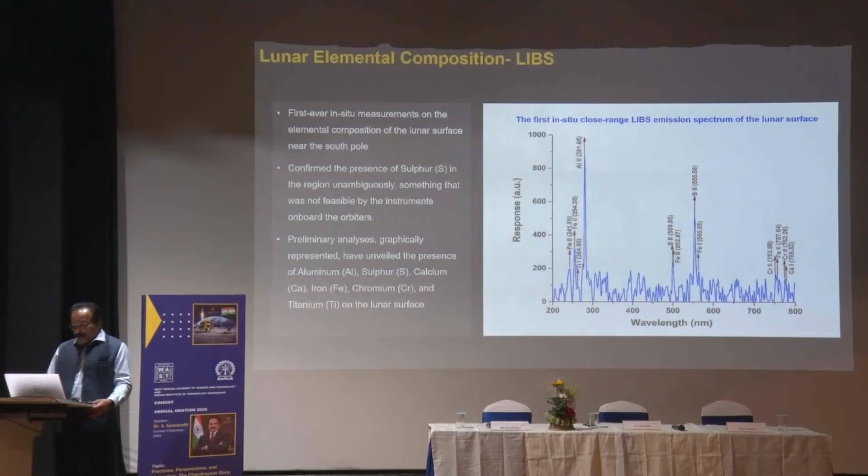Why sulfur is appearing on the surface of the moon was a discussion point, since sulfur generally only appears if there are geological processes driving it from underneath to the top. This gives a case for some internal processes pushing sulfur to the surface. There are many topics of that nature, but other elements like calcium, iron, chromium and titanium are abundant, similar to what we find on the surface of Earth.

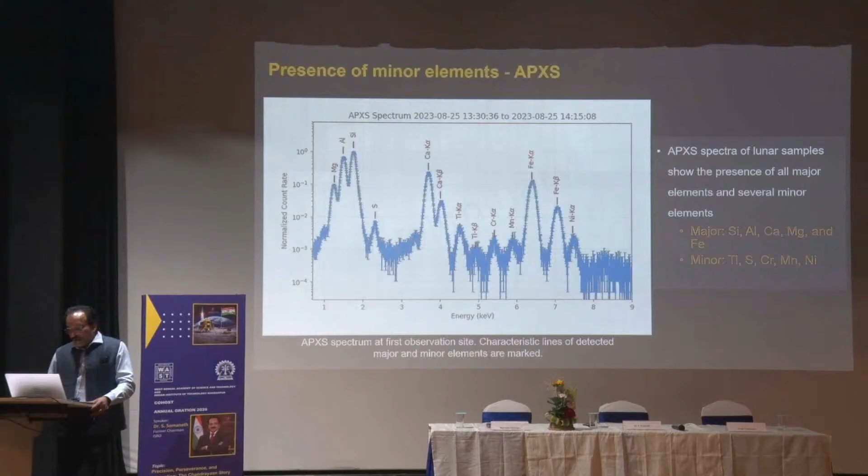The alpha particle APXS also did similar measurements, and we have data on minor elements which is clearly brought out in this. These results can be seen in publications in peer-reviewed journals. The Rambha Langmuir probe showed that the moon surface also has charged particles.

There is no atmosphere, so electrons and other particles are there on the surface, and this knowledge of electrically charged particles on the moon surface is so crucial for future communication purposes. So there are discussions going on: why don't you deposit some communication systems on the moon surface, like a GPS equivalent based on the moon? And this knowledge of charged particle densities is very important to understand how the moon can

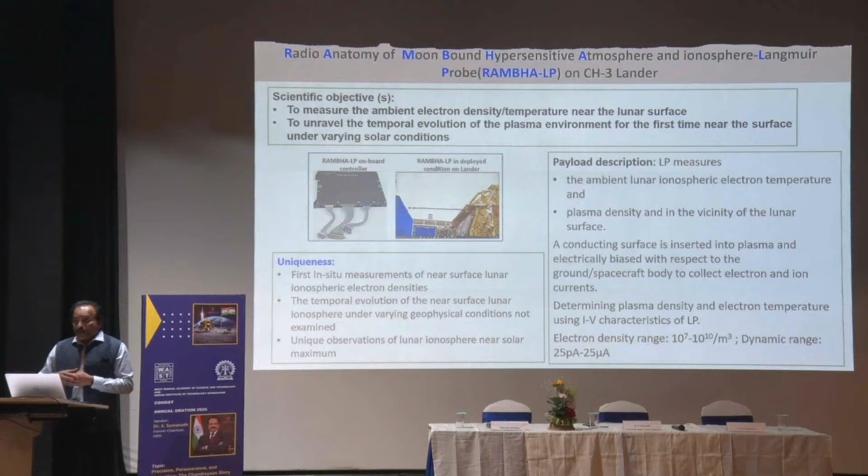be used. And today we know, based on the measurements, that the density of charged particles is not as strong as we hypothesized, which is good. In the future, possibly we may be able to put short-height transmitters at locations, and a moon-based GPS in the future could be derived, because that's a very interesting topic which is under discussion under the Artemis Accords. So, near-surface plasma content, which is the same as I just mentioned.

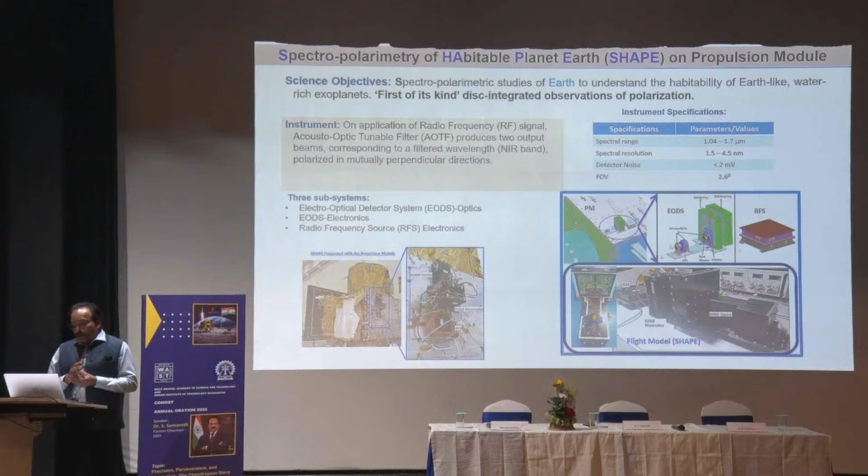The spectroscopy of Earth was done by an instrument which was put on the orbiter, the propulsion module. It was not part of the lander, and the propulsion module currently is non-functional. So it went to orbit and it actually went out of the moon orbit. It came to the Earth orbit, and now it is currently back in the moon's orbit. So it's actually moving around the Earth-Moon system.

And during this process, it actually captured much of the information required. Today, we have a wealth of information on the spectroscopic side, looking at Earth and taking its spectral characteristics from an outside viewpoint. I think it's something very interesting. Possibly more science will come out of it when you look at exosolar planets and others.

Now, after this moon mission, the Chandrayaan-3 program was coming to an end on the 14th day. I asked my team, why don't you do something very different? Can we really reignite the craft and then take it to a farther away point? And this we discussed as a hop experiment. Why don't you just make a hop?

But then my scientists were skeptical. They said that if you do that, we have only one more day. If you do that, you topple it and leave it on the moon surface toppled. I said, anyway, it has done all its functions. Let us do it. And we did the reprogramming.

And we did an entire simulation that night. And we loaded the new software into it and then reignited the stage. But then we did a very cautious short hop so that it doesn't topple. We just went up and then moved half a meter away. The advantage is that when you do that, the entire location changes and we were able to repeat all the scientific instruments like the probing, the spectroscopy, ChaSTE, at a different location, which could not have been done otherwise.

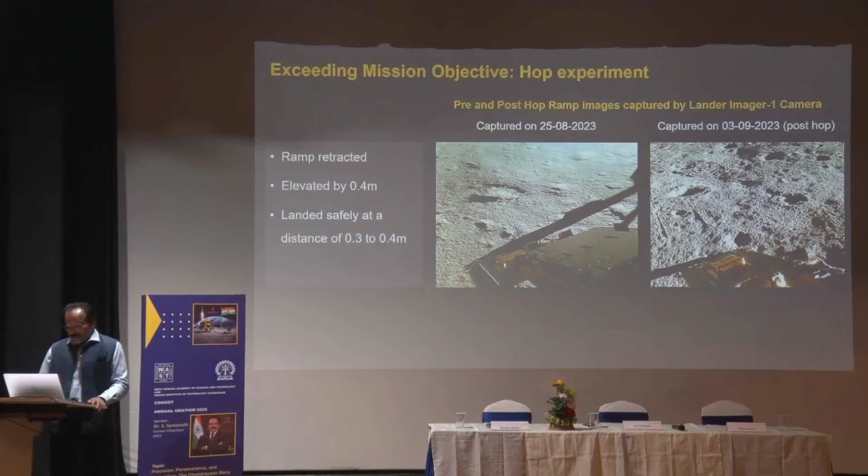So today there is a new paper which has come, because it actually did it at multiple locations, showing the spatial variation of thermal conductivity just because of that experiment. So it adds value when you do something beyond what we actually planned in the science. And I'm very happy my scientists did this and they were very successful in doing this hop experiment. You can read the article which came out yesterday in newspapers and TV.

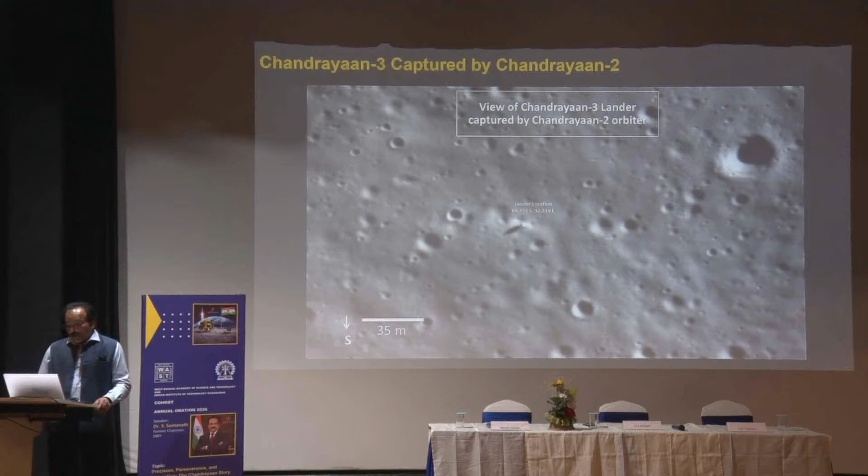So Chandrayaan-3 was actually captured by Chandrayaan-2 at its landing location. We know that it actually did not stand upright. It actually toppled and then crash landed, but we were able to take images of that also using Chandrayaan-3. Now, I would like to conclude by saying that the journey of Chandrayaan-3 is not the last part; it's a series of missions that we planned after Chandrayaan-3.

And while we were working on this, I had the fortune to propose further missions to the moon to the government and get approval. For example, Chandrayaan-4 was approved as a mission to go to the moon, do robotic experiments, take samples, pack them and send them back to Earth. This mission is fully funded by the government and we are working on it.

And Chandrayaan-5, which is a mission to deploy a 100 kilogram rover, a much bigger, nuclear-powered rover. But we have to build a lander to take that 100 kilogram rover to the moon and land it exactly at the South Pole. This rover will be built by Japan, JAXA, and the whole mission will be launched using a Japanese launcher. So it's a collaboration between Japan and India to go for a long-term 100-day survey of the moon's South Pole using a nuclear-powered rover. So both these projects are currently on. We will be continuing this part.

But we are not ending with the moon alone; we also have further exploration programs. One of them is a Mars lander, which is again an approved program. Before I left, I could convince the government to get these programs approved, and also a mission to go to Venus. Venus is a very interesting planet where we have a very thick atmosphere, almost 100 bar, a sulfuric acid atmosphere. So how to penetrate and then look deeper into it and make sense

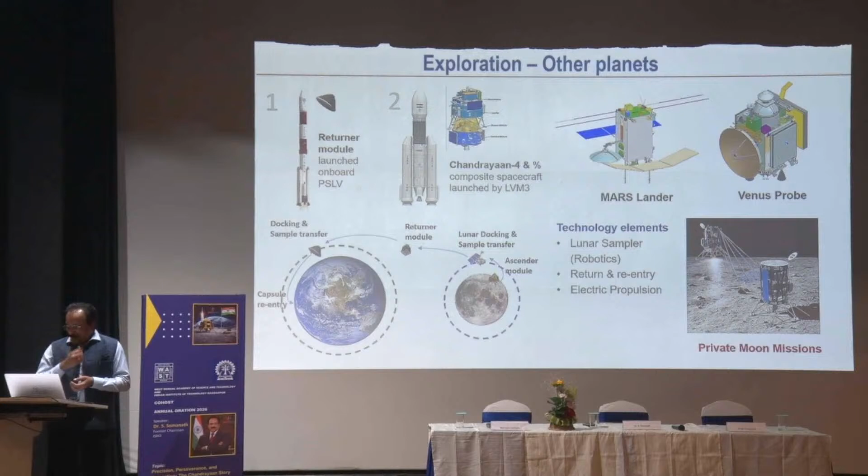Can Earth become anytime like Mars or Venus due to some geological activities? What are the processes that actually make life sustain on Earth and not sustain on planets like this? These are important questions. Humanity should find answers by sending missions to such places. There have been many missions in the past, and India also should put our foot forward in finding out and contributing to these domains.

And I am also very happy to say that a space vision has come out of the success of Chandrayaan-3, that long term we will actually land an Indian on the moon. But this is a very difficult journey. We need to build capacity to send humans to space. We should build a space station, and we also got an approval for the Bharatiya Antariksh Station, and for building a new rocket which is a much heavier capacity launcher.

All this happened in the last year after the Chandrayaan-3 success, and I am really happy that we triggered all these activities in ISRO. The country and many labs and institutions are collaborating and cooperating to build this capacity for us in the long term. So with this, let me conclude and thank each one of you for the patient listening.

I believe that some elements of what we wanted to highlight, the innovation elements, the technology elements, what science has come out of it, have been brought out in my presentation, and this all came because we collaborate globally and work with multi-institutional capacity, including educational institutions, research labs and industries in this country. With that, let me thank you.

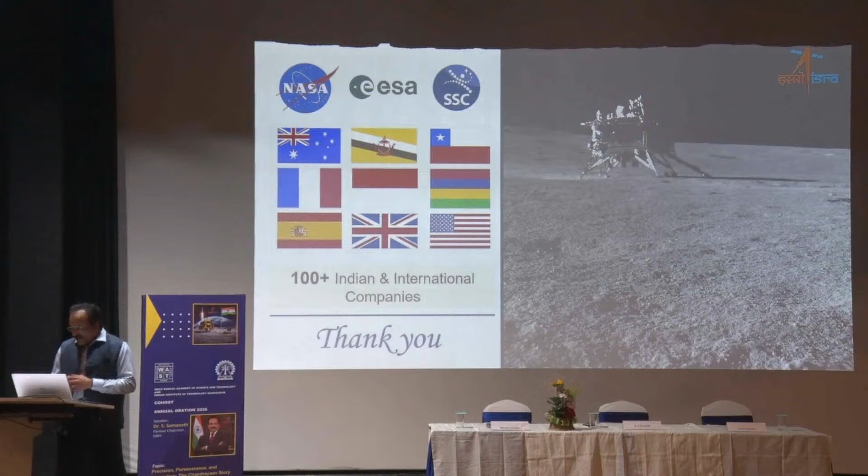So thank you. But you will be answering, if there are any. I need one, or you can use this. So, Shunat. Yeah, hello? No, it's not working. Anyway, now you can hear me. So, the session is open for questions and discussions. Yeah, thank you very much. Okay, am I audible?

Yeah. So, sir, I have a very specific question. We did a part of the simulation based on ISRO-supplied data, and I'll come straight to the point. This is regarding retargeting on minor hazards at 150 meters from the ground. From Chandrayaan-2, Chandrayaan-3, and Chandrayaan-4, we are probably planning for trajectory refinement, using the earlier trajectory for the next one. And we now probably have a DEM, the digital elevation map, of the landing site.